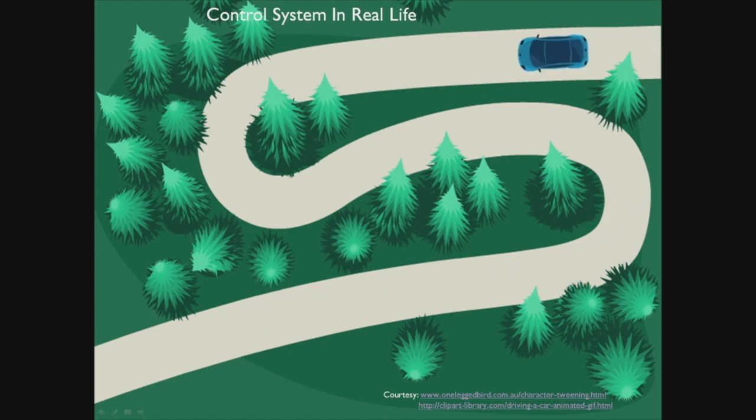In order to understand how a rocket is able to steer itself from its starting position to reach its destination, let us make use of a very simple example. Imagine that you are traveling in a car. You want to go from your starting position to your destination by following the road ahead. How do we do it?

First of all, we need to understand where we currently are. In order to understand this, we make use of our senses, that is our eyes, to scan the surroundings and understand our current position.

After knowing where we are, we need to know where to go next. These days, we make use of services such as Google Maps to tell us where to go next - whether to go straight, take a left turn, or take a right turn. So now we know our current position and where to go next.

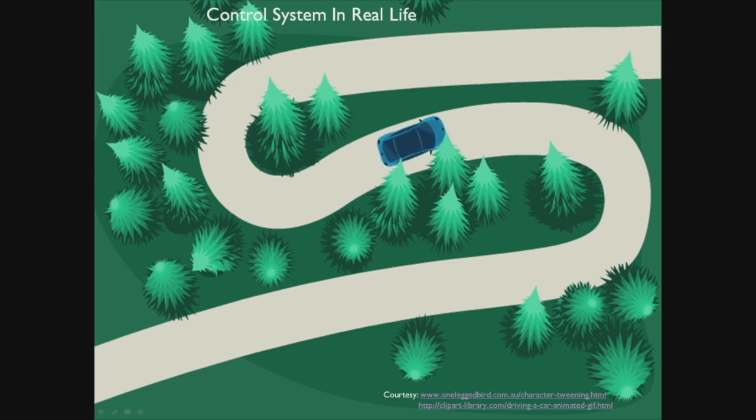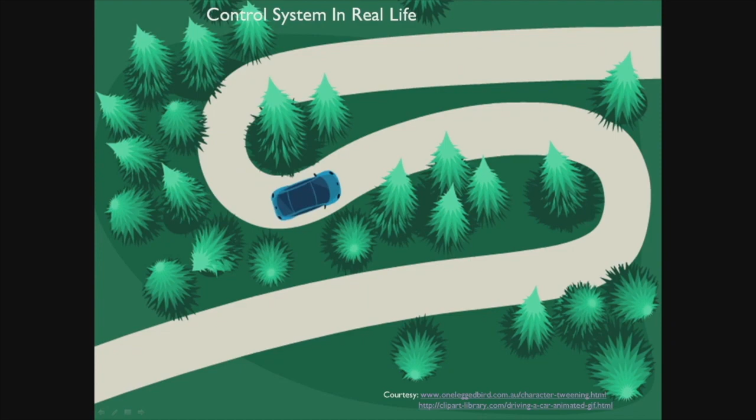This information is processed by our brain to determine how much we need to rotate the steering wheel to get back on the correct path. At the same time, we use our legs to control the accelerator and the brakes to control the speed of the vehicle.

Let's go through this once again for a clearer understanding. In order to reach our destination, the first question we need to answer is, where am I currently at? As I said before, while driving we use our eyes to understand our current position - so our eye is a sensor.

What is a sensor? A sensor is any device which measures a physical property from our environment and then converts it into electrical data which we can measure. Here, our eyes take data from the environment and convert it into electrical signals which our brain can read.

This process, whereby we are able to answer the question of where am I, is called navigation.

After understanding where we currently are, we need to decide where to go next. As I said before, we can use Google Maps to guide us on the correct path to our destination. This process, which tells us where to go next in order to reach our destination, is called guidance.

So now we know where we are currently and where to go next. Our brain makes a decision of how much to turn the steering wheel to stay on the correct path - our brain acts like an autopilot. The autopilot gives instructions to our hand muscles to turn the steering wheel at the correct angle to help us reach our destination effectively. In the context of a rocket, our hand muscles will be referred to as actuators.

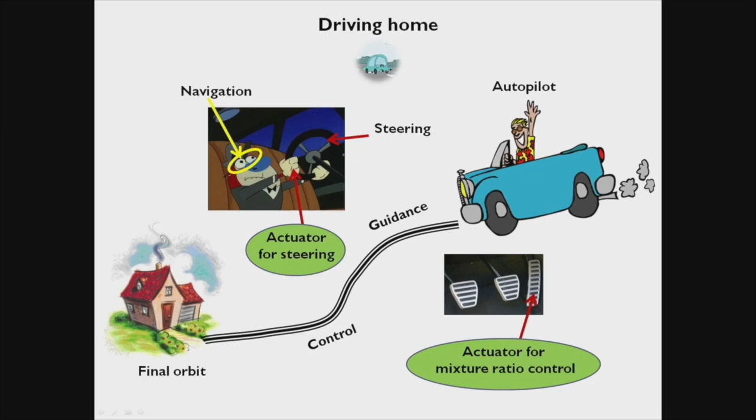Now let us apply what we have learned in the case of controlling a car to the case of controlling a rocket.

Here we can see one of ISRO's rockets, the GSLV Mark III, lifting off from the launch pad in Sriharikota. The final destination of the rocket is 350 km above the Earth's surface in order to launch a satellite into orbit. So in order to reach its destination, the rocket follows a path shown in red.

In the rest of the module, we will try to understand how the rocket is able to move from its starting position at liftoff to its final position at the orbit, and then release the satellite into the predetermined orbit to achieve its mission.

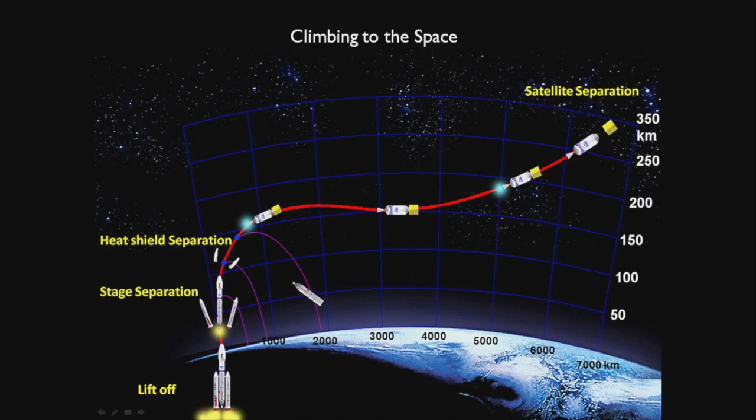So now let's go through an animation which explains the process. Here we can see the GSLV Mark III rocket launching itself from the launch pad.

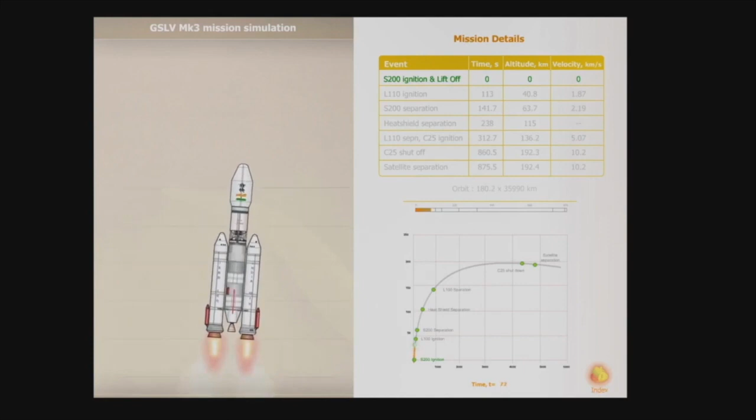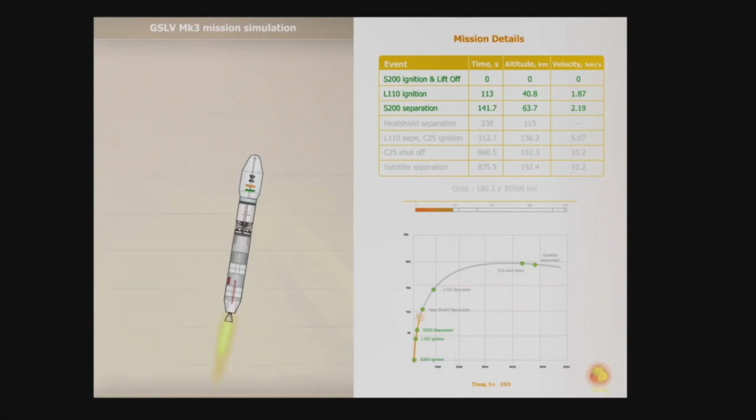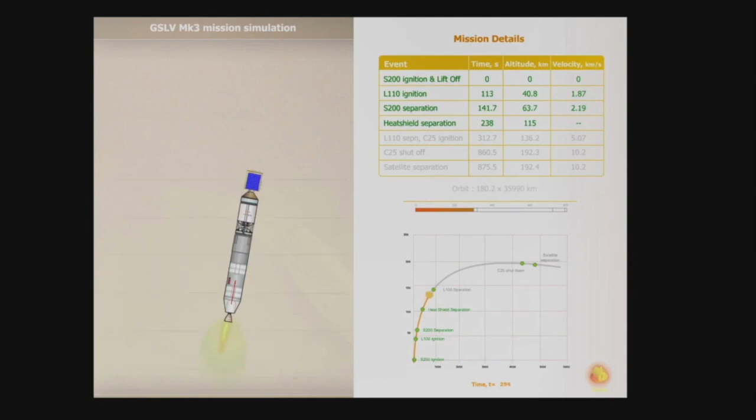The starting point is the launch pad and the final destination is the orbit in which the satellite has to be deployed. On the right side, you can see the path that is to be taken by the rocket to reach its destination. One thing to note is that the rocket does not move in a straight line to reach its final destination, but rather moves in a curved path.

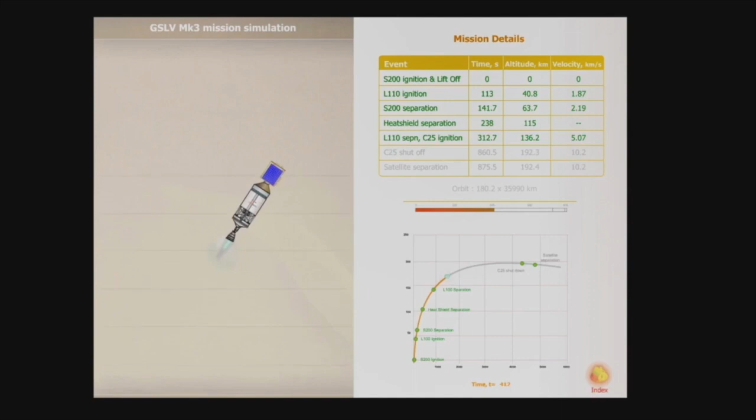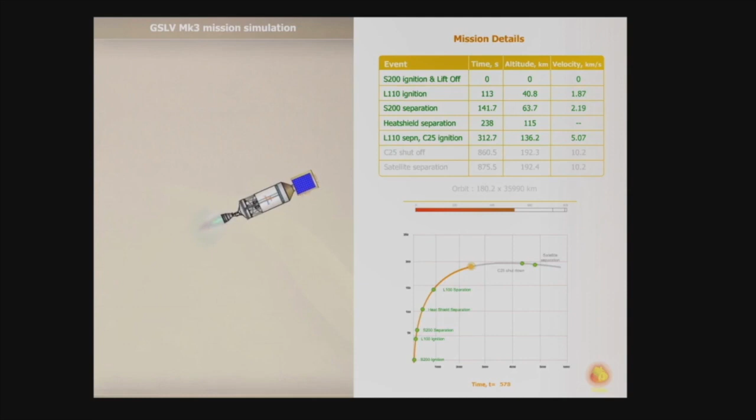The reason why the rocket moves in a curved path will be covered in subsequent modules. The path in which the rocket should move is predetermined and pre-calculated, and the rocket uses its muscles, that is the actuators, to steer it through the correct path towards the required destination.

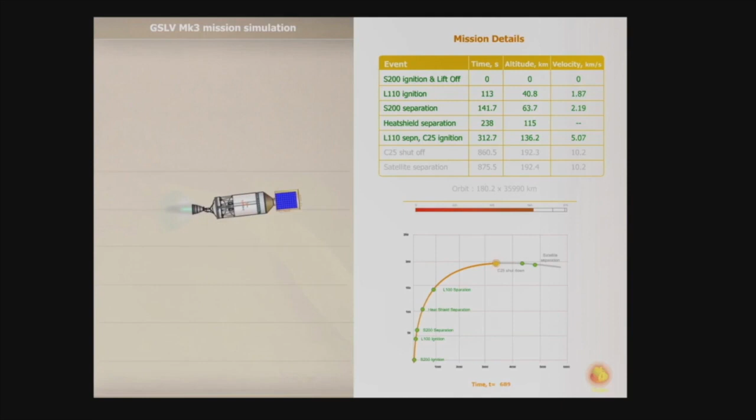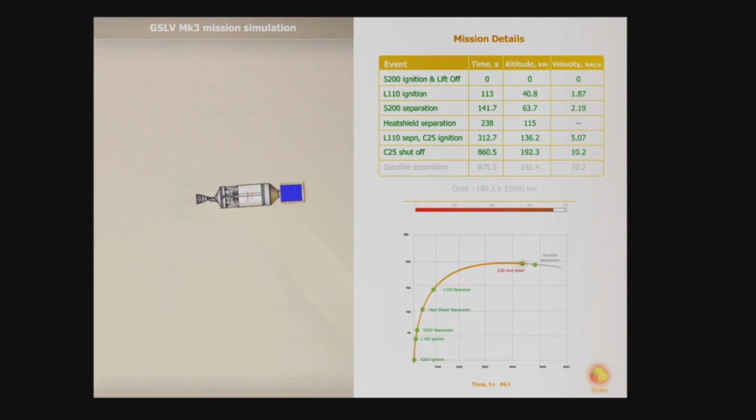As you can see, the rocket rotates in a very controlled manner and it is also very stable throughout the entire flight. So finally, the rocket has reached its destination, that is the orbit in which it has to deploy the satellite. Once it has reached the orbit and received a confirmation for it, it will deploy the satellite into the required orbit.

Now let us come to the major systems which are involved in the navigation, guidance and control of a rocket. Here we can see a picture of another ISRO rocket, that is the GSLV Mark II.

For moving from its starting position to its destination, it has to answer the first question, that is where is it currently at. Similarly to a car, the rocket has sensors located on the top portion in order to answer the question of where am I, and the process of answering this question is called navigation.

After knowing its current position, the rocket should be able to tell which is the next position it should move to. This process is called guidance.

The autopilot, that is the brain of the rocket, takes the input of where it is currently at and where it should be, in order to generate the required steering input to move the rocket in the correct direction.

The control power plants of the rocket, that is the muscles or the actuators of the rocket, are responsible for steering the rocket in the correct direction based on the input given to it from the autopilot.

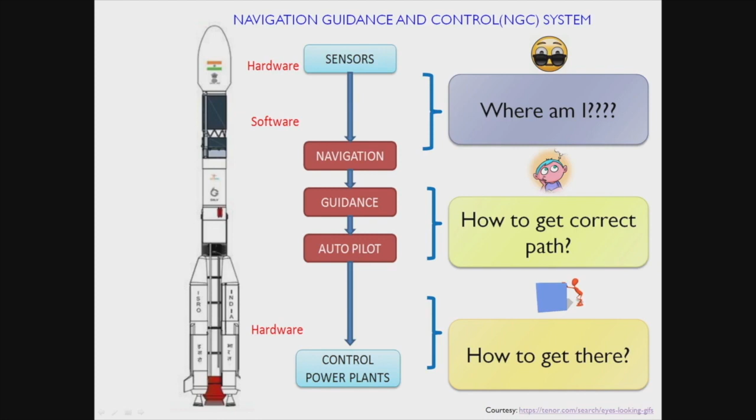As we have discussed before, all three systems, that is navigation, guidance and control, are equally responsible for helping the rocket get to its final destination by following the predetermined path.

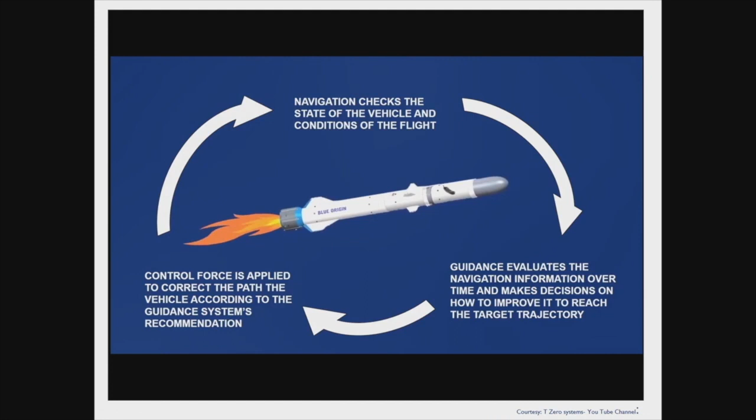Let us see another animation explaining how navigation, guidance and control work together to help the rocket move in its correct path. Here we can see a rocket moving in its predetermined path to its destination.

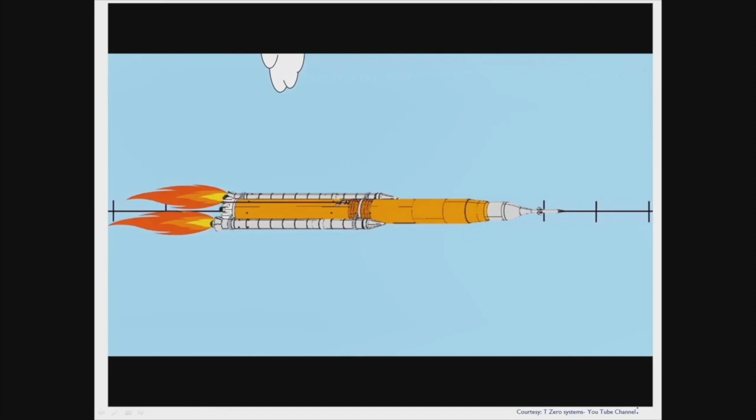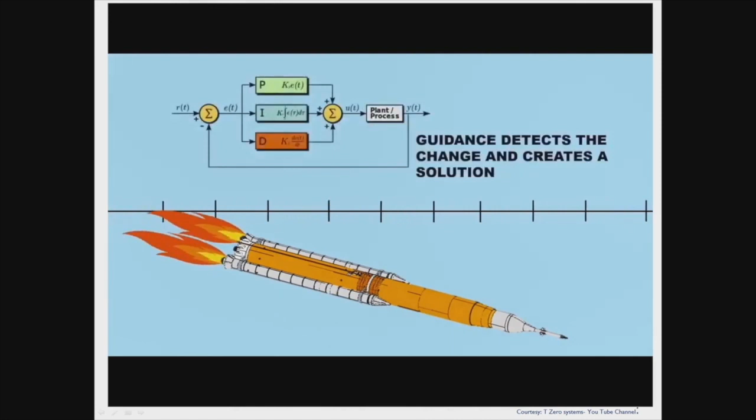Due to some external force acting on the rocket, it is deviated from its correct path. The navigation understands that the rocket has moved away from its predetermined path, and the autopilot takes corrective action in order to bring back the rocket to its correct path.

In order to understand how the control system of the rocket functions, it is necessary to understand all the forces that are acting on the rocket as it moves through the atmosphere.

The first force is called lift. Lift acts in a direction perpendicular to the direction of motion of the rocket, and it acts on the body due to the interaction of the rocket and the atmosphere.

Similarly, drag is also a force that acts on the body of the rocket due to its interaction with the atmosphere. Drag acts in a direction opposite to the direction of motion and thus opposes motion.

Weight is the force generated by gravity on the rocket. The weight of the rocket acts through its center of gravity.

Thrust is the force which pushes the rocket forward. Thrust force is generated when fuel is combusted in the combustion chamber and it is ejected out of the nozzle at very high speeds.

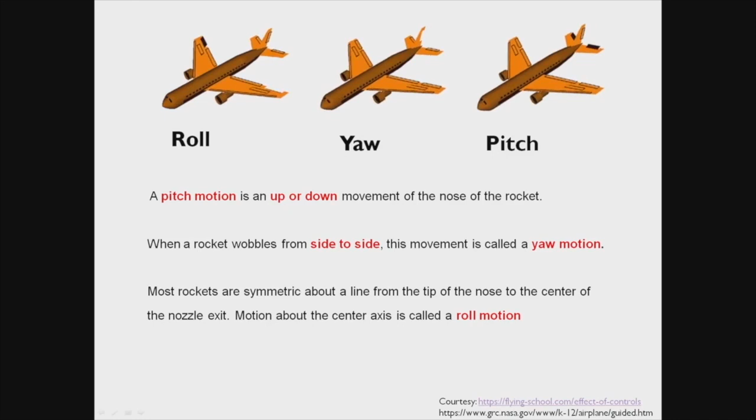Now let's understand the rolling as well as pitching motion that is happening in a launch vehicle. First of all, we have discussed earlier the case of roll, pitch, yaw in case of an aircraft. Aircrafts have special aerodynamic surfaces called control surfaces, which are present on the surface of the body of the aircraft, which help it undergo roll, yaw as well as pitching motion.

As you can see on the bottom right corner, the aircraft is undergoing a yaw maneuver, and to help it do so, you can see a black control surface present on the tail of the aircraft. As the control surface moves, the nose of the aircraft moves left as well as right. So there are different names for these control surfaces: aileron, rudders, elevator, etc.

These control surfaces are used by aircraft because an aircraft never leaves the atmosphere, and a control surface only works when it has air to interact with. Now let us come to the case of a launch vehicle. In case of a launch vehicle, mostly the control of the steering angle is achieved either through thrust vector control or through propellant flow control.

So here, first let's see what rolling as well as pitching look like in a launch vehicle. First rolling, next pitching.

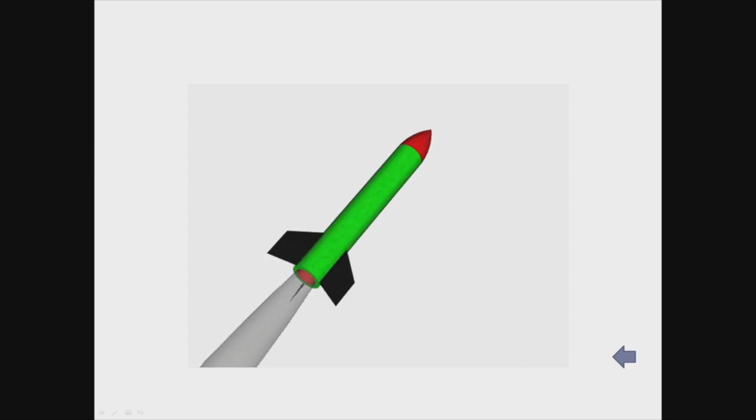There are two ways by which we can control the direction in which the rocket moves forward. The first is thrust vector control, achieved by moving the nozzle of the rocket using actuators in the appropriate direction. Fuel undergoes combustion in the propulsion system of the rocket and gets ejected out at very high velocities through the nozzle. By controlling the angle at which the combustion products exit the rocket through the nozzle, we are able to control the direction of motion of the rocket.

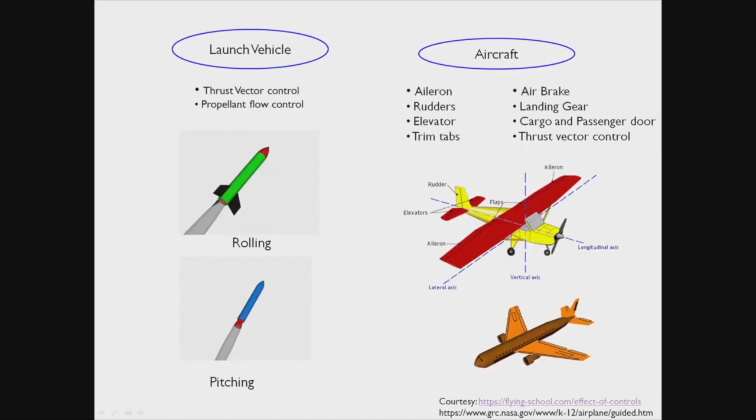In this module, we will be mainly focusing on thrust vector control.

Now let's understand how the rocket is able to take a turn and then accurately track a path towards its destination. In the picture shown in the middle, the rocket is moving straight upwards without any deviation. In order to move the rocket either towards the left or the right, we have to rotate the nozzle of the rocket using actuators.

Now let's come to the picture on the right. We need to rotate the rocket by a small angle towards the right. To achieve this, we rotate the nozzle of the rocket to a small angle using our actuators. This creates an angle between the thrust line and a line passing through the center of the rocket. This angle causes a rotating moment to act on the center of gravity of the rocket, called the torque, causing the rocket to rotate slightly towards the right. As long as the torque exists, the rocket will continue to move towards the right hand side.

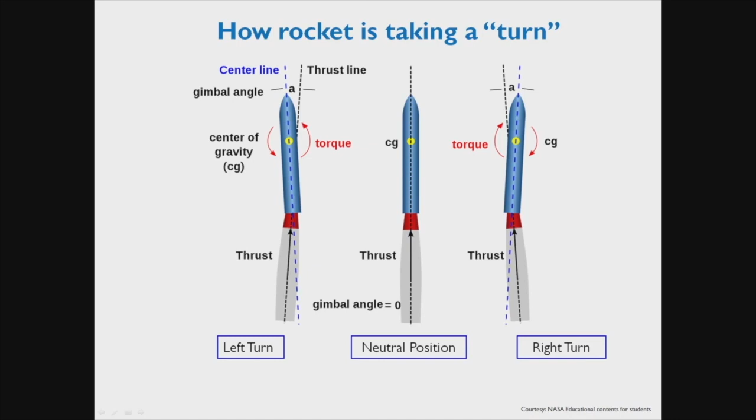Similarly, on the left hand side, the rocket takes a turn towards the left. To do this, the nozzle of the rocket appropriately turns, causing a rotating moment or torque to act on the center of gravity to turn the rocket towards the left. Now let's discuss the major thrust vector control systems used in ISRO launch vehicles.

The first one is the engine gimbal control system. This type of thrust vector control system is mostly used for liquid engines. The whole rocket engine is mounted on a rotatable joint, and the nozzle along with the rocket is attached to a suitable actuator. By controlling the angle of the engine, we are able to control the steering angle of the rocket.

Next, we will discuss the flex nozzle control system. These control systems are mostly used when the fuel used for combustion is in solid state. Here, the nozzle is mounted on a specially designed spring-like structure called a flex seal, made up of metal as well as rubber. The nozzle is attached to a suitable actuator in order to control the exit angle of the propellants, and by controlling this exit angle, we can control the steering angle of the rocket.

The next method of thrust vector control is the vernier engine. Here, there will be a main engine providing the required thrust for the rocket to move forward. Along with the main engine, there will be several smaller engines called vernier engines. By making use of suitable actuators, we can control the angle of the vernier engine and thus control the angle of the exit flow from these engines, allowing us to control the steering angle of the rocket.

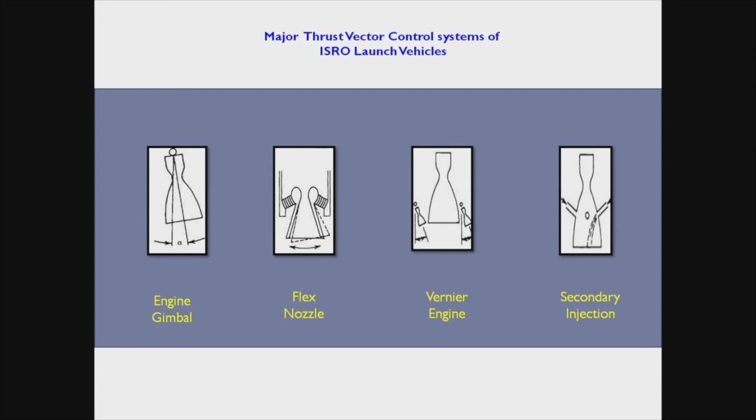A very important component of the control power plant is the actuator. An actuator can be referred to as any device that converts input energy into suitable mechanical energy which can be used for doing work.

We will be mainly discussing three types of actuators. One is an actuator which makes use of electrical energy to do work. This is most commonly seen in wiper motors of cars.

The next is a hydraulic actuator. A hydraulic actuator makes use of fluid under very high pressure in order to do mechanical work. This is most commonly seen in excavators in order to lift huge amounts of mass.

Next, let's discuss the pneumatic actuator. In principle, it is similar to a hydraulic actuator, but instead of making use of a liquid at high pressure, a pneumatic actuator makes use of air at high pressure to do mechanical work. These are most commonly seen in the automatic closing doors of buses.

A suitable actuator is chosen and attached to the nozzle of the rocket in order to control the angle of the exit flow of the rocket, and by controlling the angle of the nozzle, we will be able to control the steering angle of the rocket.

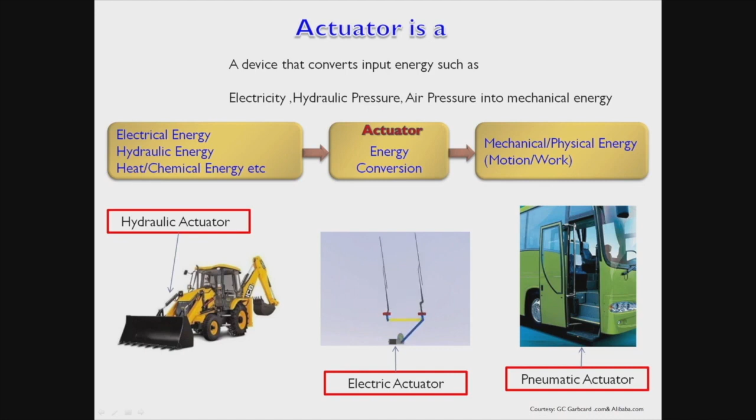What are the different types of actuators? A pneumatic actuator makes use of air under high pressure to do mechanical work. A hydraulic actuator makes use of a liquid under very high pressure to do mechanical work, whereas an electric actuator makes use of stored energy in a battery to do mechanical work, and a thermal actuator makes use of a heat source to do mechanical work. At the bottom of the slide, there is a graph showing the force as well as the displacement available from several different types of actuators.

In launch vehicle applications, there is usually a requirement of very high force along with very high displacements. Under such conditions, we mostly make use of electromechanical actuators or hydraulic actuators to move the nozzle. We do not make use of pneumatic or thermal based actuators for steering control of launch vehicles.

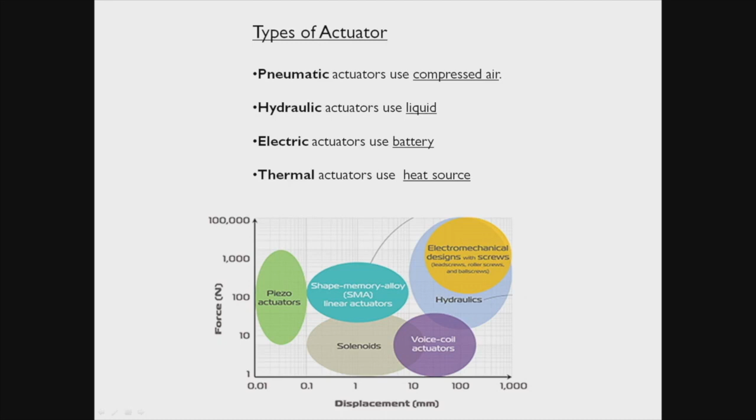In case of rockets, mostly electro-hydraulic actuators as well as electromechanical actuators are used. In an electro-hydraulic actuator, we make use of fluid under very high pressure in order to do mechanical work.

A very simple explanation of the electro-hydraulic actuator is shown here. The idea is to convert fluid pressure into motion of a piston.

We make use of a piston cylinder arrangement, and when we pressurize the area between the cylinder, the piston moves outward doing mechanical work.

Correspondingly, when we drain out the fluid that is filling the space between the piston and the cylinder, the piston returns back to its original position.

In an electromechanical actuator, we convert the rotary motion of a motor to a linear motion of an appropriate shaft. We do this by making use of appropriate mechanisms called roller screw mechanism, ball screw mechanism.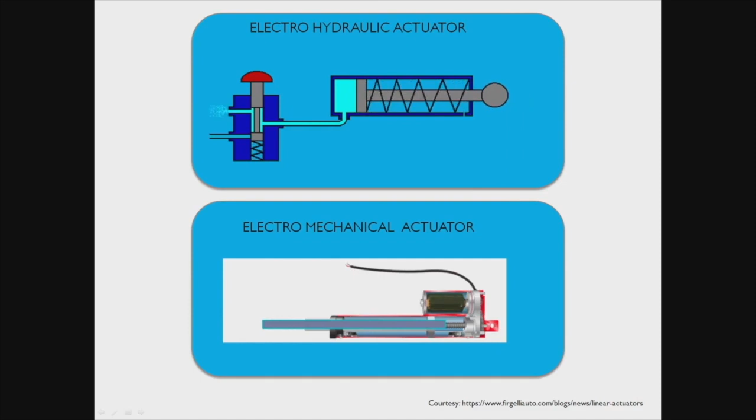The engine as well as the nozzle is mounted on a freely movable joint, and one end of the actuator is attached to the rocket and the other end of the actuator is fixed to the end of the nozzle.

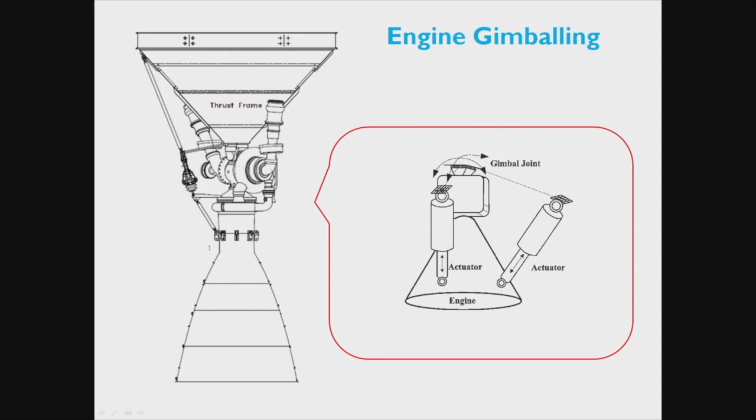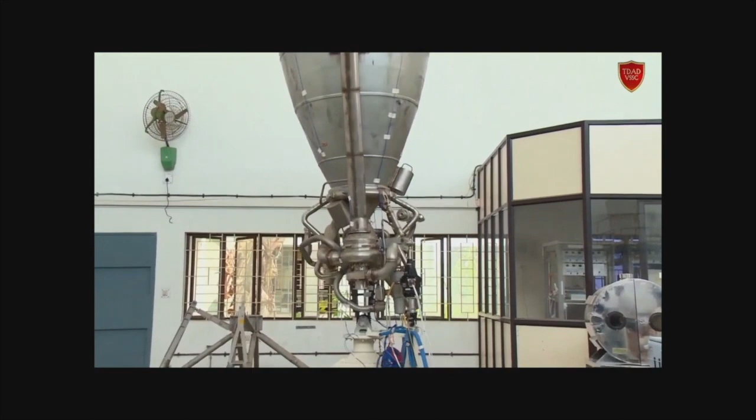Let's see a video in which the actuator is used for moving the nozzle. Here we can see that we are making use of an electromechanical actuator in order to move the nozzle in the specified direction. This is a test that is done in order to evaluate the performance of the actuator.

The location of the nozzle along with the actuator is shown in this video. This is a GSLV Mark III rocket and the nozzle is located at the middle of the rocket. Here we can see that the actuator is used for controlling the position of the nozzle.

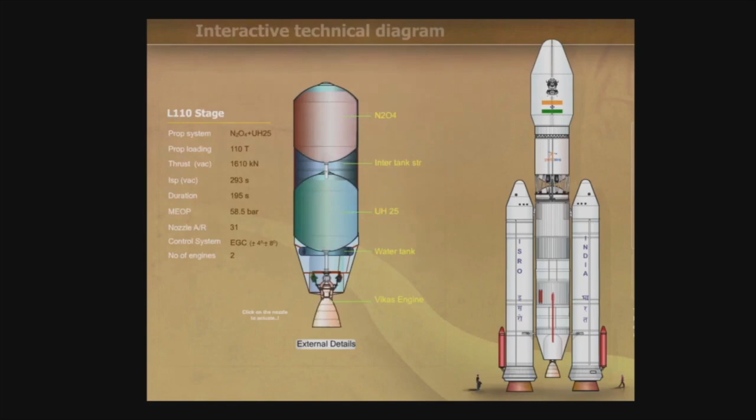Let's understand how a flex nozzle control system works. In a flex nozzle control system, the nozzle is mounted on a special spring-like structure.

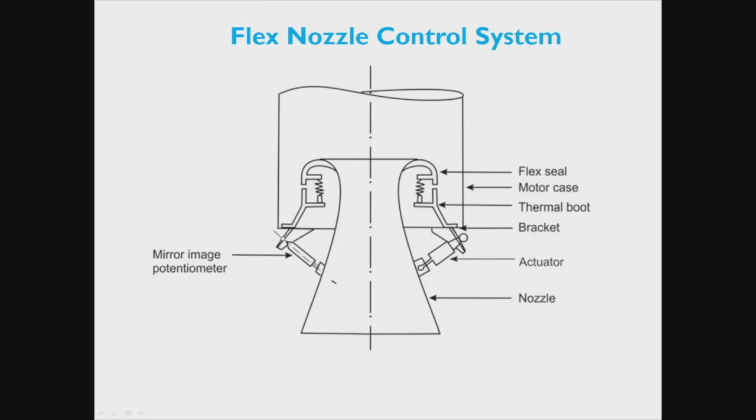The actuators are attached to the nozzle and are used for controlling the position of the nozzle. A flex nozzle control system is more commonly used in systems which make use of solid fuel.

Products of combustion are coming out through the nozzle at very high velocities. By making use of a suitable actuator, either electromechanical or electrohydraulic, we are moving the nozzle in order to control the steering angle of the rocket.

This is also a test that is done in order to evaluate the performance of the propulsion system as well as the actuator.

Here we can see the location of the solid rocket motor along with the flex seal nozzle and the actuator. As you can see, the actuator is used for controlling the position of the nozzle.

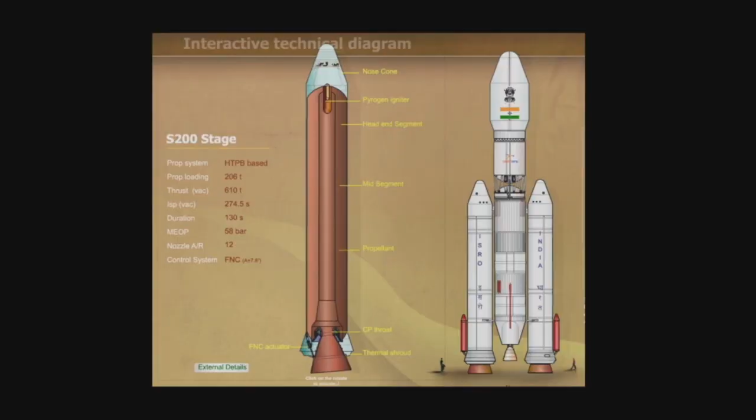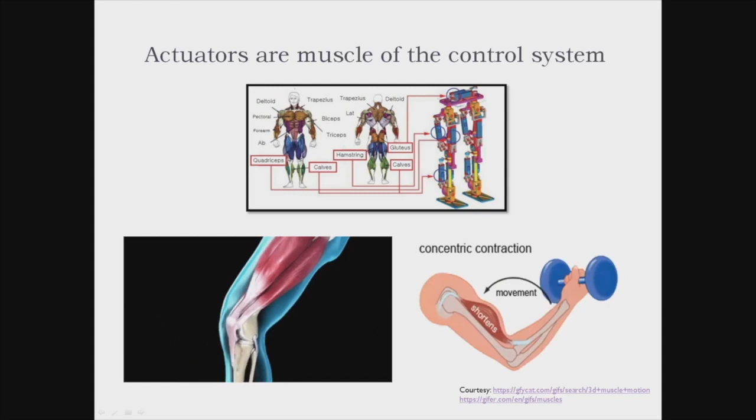Now we have gone through the main part of our control power plant, that is the actuator. Actuators are like the muscles of the rocket, which help the rocket move in the correct direction. Sensors and actuators are two very important components of any control system.

A sensor is any device which is capable of measuring any physical property and then converting it into electrical energy which can be read by a suitable computer. A physical property could be temperature, pressure, etc.

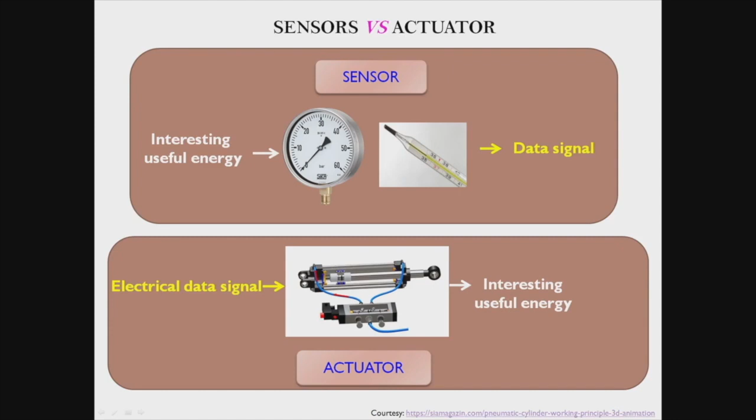Whereas an actuator receives an input in the form of electrical input and then converts it into useful energy.

Next is GSLV, which stands for Geosynchronous Satellite Launching Vehicle. Third is GSLV Mark III, which stands for Geosynchronous Satellite Launching Vehicle Mark III.

First stage of PSLV is a solid stage and makes use of SITVC mode of thrust vector control. The second stage of PSLV is a liquid stage and makes use of an electromechanical actuator for thrust vector control.

The third stage is a solid stage and makes use of an electromechanical actuator for steering control of the rocket. Finally, in the last stage, which is a liquid stage, an electromechanical actuator is used for steering control.

In case of GSLV, the strap-on motors, that is the L40, make use of electrohydraulic actuator. The second stage, which is a liquid stage, makes use of an electromechanical actuator. Finally, the cryogenic upper stage makes use of electromechanical actuators.